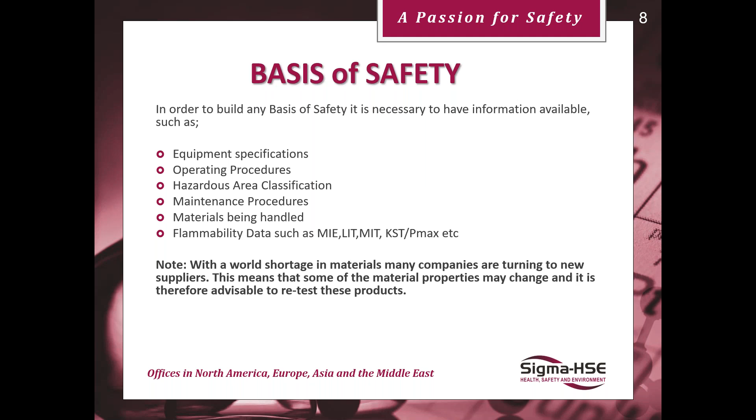With a world shortage in materials, many companies are turning to new suppliers. You may need to consider looking into these new supplied materials because particle size, chemical structure, etc. may alter the values that you have. So it's best sometimes to revisit and look to see whether you have the correct data.

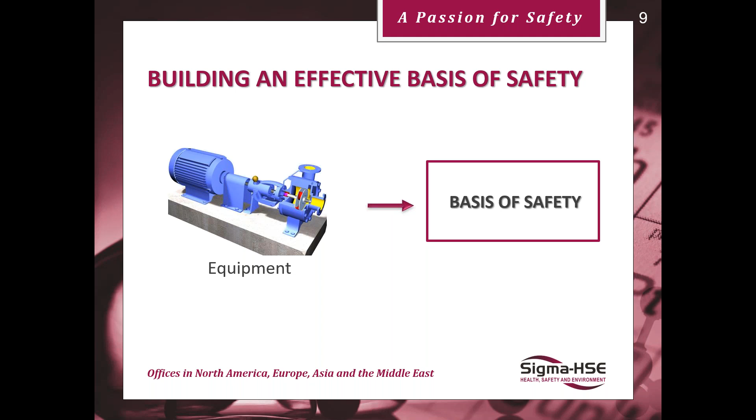So build an effective basis of safety. What equipment are you using? Silos, screw conveyors, hoppers, blenders, mixers, all that type of information has to be looked at, along with the procedures that you have in place for the operation. Are they mechanical? If so, what type of procedures do you have in place for making the operation safe? These have to be put into the basis of safety.

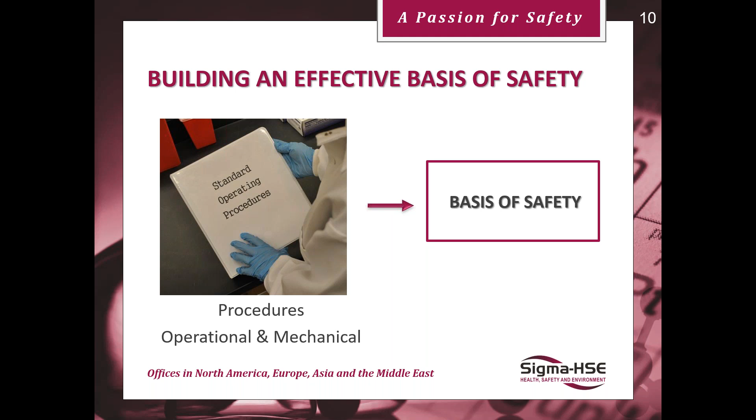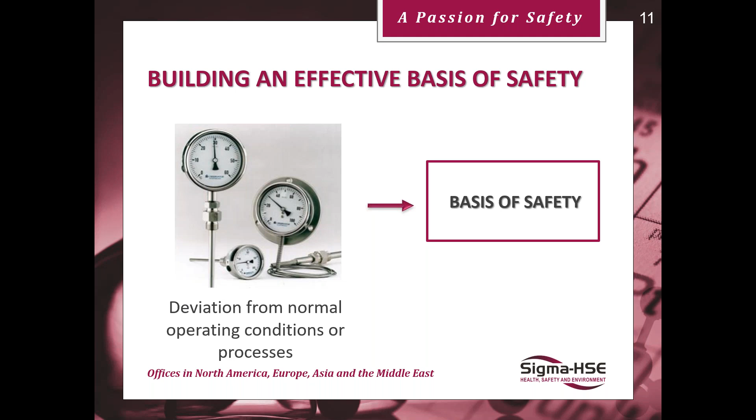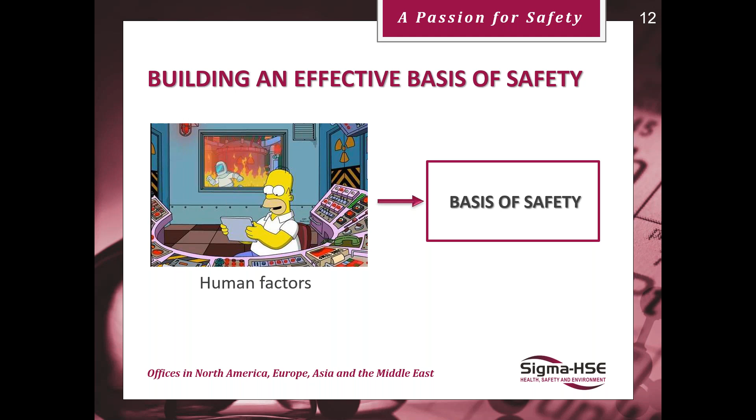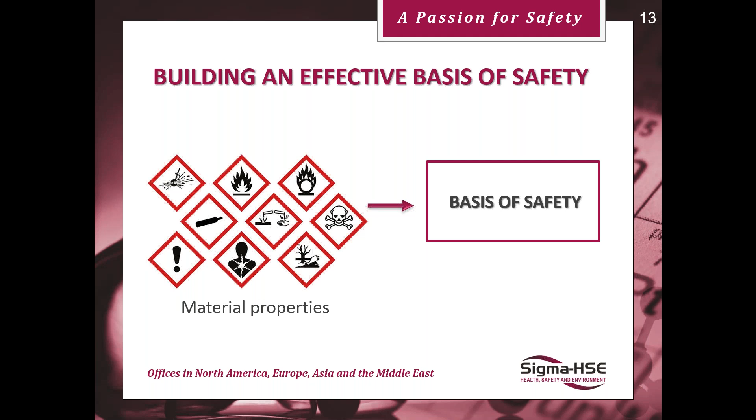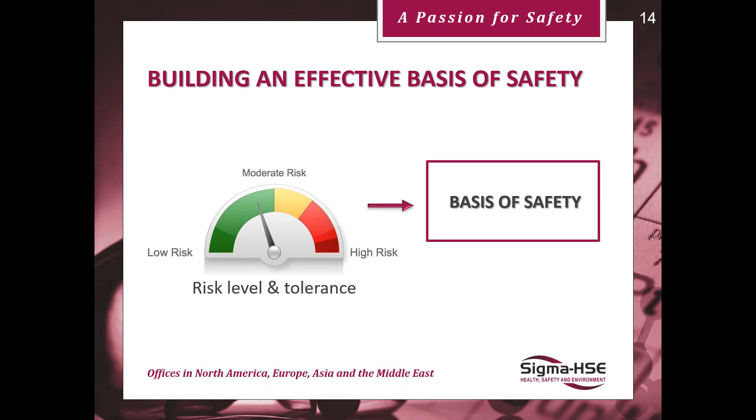One area we looked at many years ago was a grain operation with a silo and pneumatic conveying system, hoppers, etc. And they had avoidance of ignition and explosion protection as their basis of safety. Why did they do that? Because they were up on a hill, and down below them was an infant school. If anything had gone wrong, that could have affected the infant school. Therefore, their level of risk was extremely high.

There's many more things you could consider. So when you look at your operations and how it works, think of all the different things that you need to put into your basis of safety to make it work.

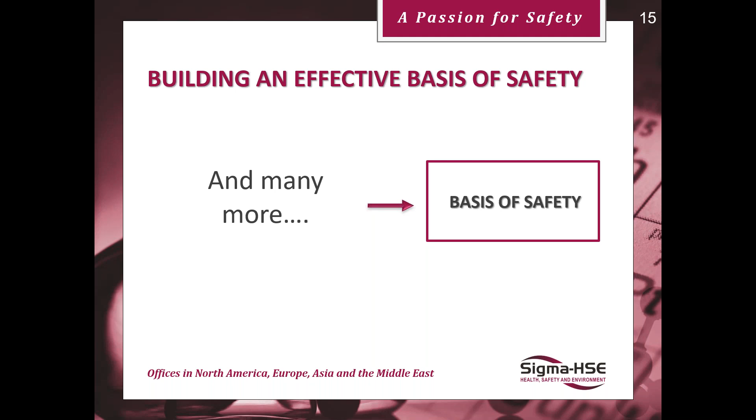We're looking here today at fires and explosions to do with dusts and powders. So normally there's three types of basis of safety for fire and explosion risk. We can look at explosion prevention. We can achieve this by avoiding flammable atmospheres, avoidance of ignition sources, avoid sufficient energy to ignite the explosion. And we could look at explosion protection, reduce the damage done to plant, or how they affect employees by explosions.

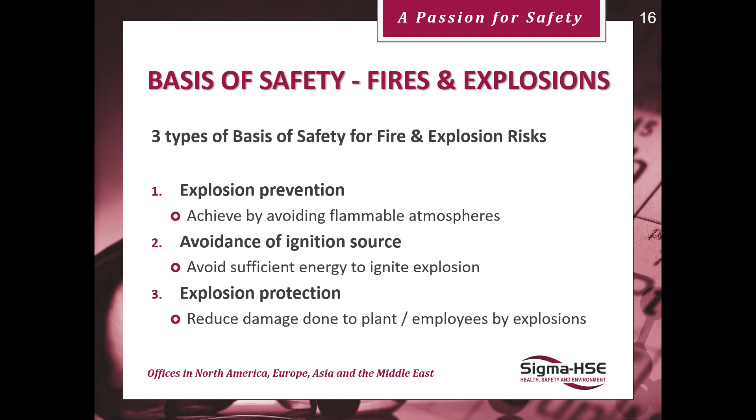So what are the conditions for a dust explosion? Well, the dust must be flammable or combustible and airborne to form a cloud. The concentration must be within the explosible limits of the fuel. The particle size distribution should be capable of propagating a flame, normally less than 500 micron. The atmosphere, normally air, in other words, the oxygen content of it, needs to support combustion. And they must have a sufficiently energetic ignition source to ignite the flammable dust cloud.

So we have the oxidant, the fuel, and the ignition source. That's in the shape of a triangle, or the fire triangle as we know it. Then we mix. So we mix the product and the air together to form, let's say, a dust cloud. And then it has to be confined. So the confining part of it creates the explosion.

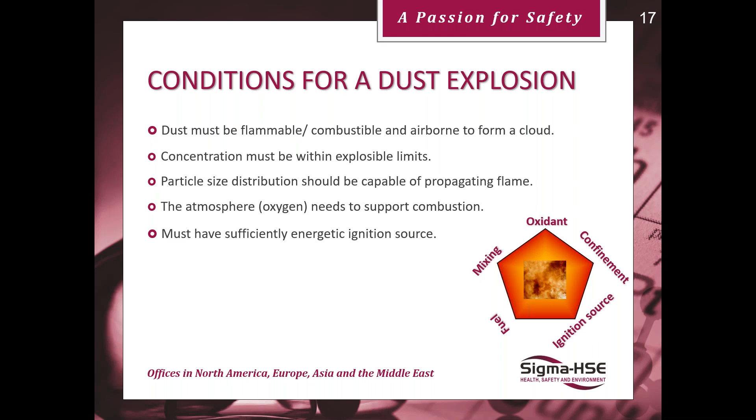So flammability testing, why is it important? Well, you need to know about it to understand the explosive properties of your materials. It's required to understand the sensitivity of materials to potential ignition sources. This could be mechanical, could be electrostatic, could be hot surfaces. It helps you determine whether you can stay outside the flammable limits or not. And it's a legal requirement on the EU safety data sheets as of 2021.

Testing can be split into 3 sections: explosion prevention, avoidance of ignition sources, and explosion protection. As we said earlier, the 3 types of basis of safety.

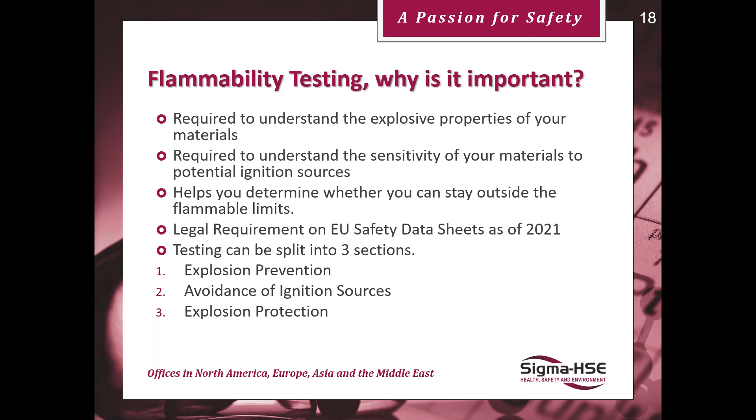I mentioned the EU safety data sheets. Annex 2 of REACH has been amended concerning the compilation of safety data sheets from the 1st of January 2021. I can remember being in a meeting talking about whether we should include this on safety data sheets. And surprisingly, a lot of people didn't have any knowledge at all about dust explosions. And after explaining it, straight away people realized the hazards and the risks involved with this, and then put forward, along with the US, to bring in flammability data.

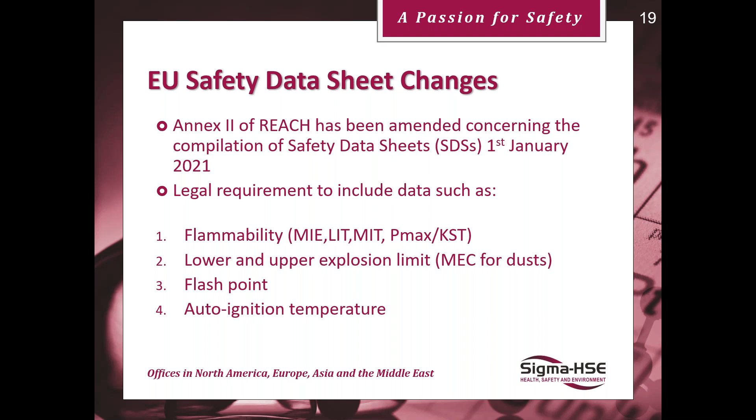These are safety data sheets, and therefore they should carry safety data for your operation. So with respect to flammability, you could have MIE, MIT, LIT, Pmax, KSt, for instance. They talk about lower explosion limits, the LEL and UEL, but this is the MEC for dusts. And then for liquids, flashpoint, auto-ignition temperature. Each one of these things needs to be put on a safety data sheet.

So a list of potential flammability data you could get if you look at your product. And it's going to depend on which basis of safety you select. So you've got the MIE, the minimum ignition energy, electrostatic and mechanical ignition risk. You've got minimum ignition temperature, considers hot surfaces. The layer ignition temperature for powder layers considers hot surfaces. The maximum pressure, the rate of pressure rise, and the St class are used for explosion protection.

The minimum explosive concentration, similar to the LEL, considers the flammable range. Limiting oxygen concentration looks at how effective inerting can be. Burning behavior, often one of the properties that people don't consider, but you really should look at it. This considers fire risk. How fast will a fire spread throughout a product?

Resistivity considers electrostatic issues and equipment specifications when working in zoned areas. Charge relaxation time works along with resistivity. And then you have thermal stability, particularly if you're drying and storing, coming out of dryers, for instance, you need to look at the ignition risk from thermal decompositions.

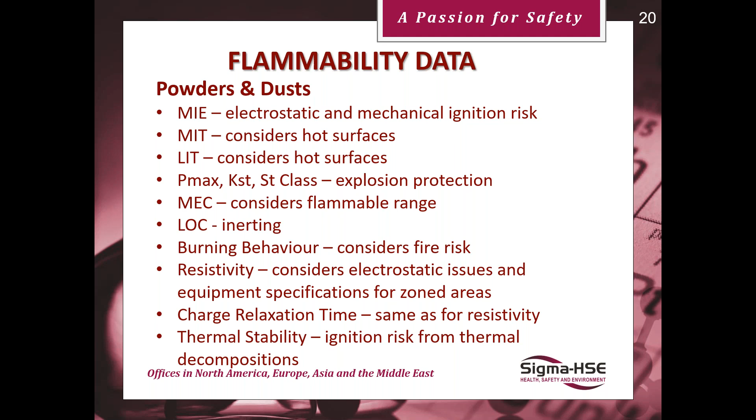So let's look at number 1 of the 3. The basis of safety is explosion prevention. First thing, have a look at the Group A-B classification. This determines whether a material will form a flammable atmosphere when dispersed in air. It could be as a dust cloud and therefore subject to the regulations set out in Europe for DSEAR or ATEX. It categorizes material into one of two groups.

Combustible, Group A, which means it's flammable or explosive as a dust cloud. If so, then you are covered by the regulations. Or non-combustible, Group B, in which case you don't have to worry. You're not covered by the regulations. You don't need any more information. It's conducted to BS EN ISO 80079-20-2 from 2016.

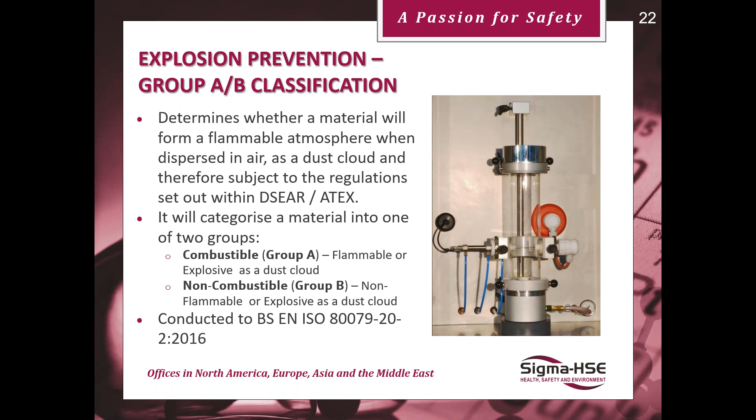So, limiting oxygen concentration. As we said, we need to remove the flammable atmosphere. Well, you can't remove the product because you're working with it. So the other alternative is to remove the oxygen out of the situation. So the minimum allowable concentration of oxygen in a mixture of dispersed combustible dust with air and inert gas, in which an explosion will not occur. Generally higher than for gases, typically 10 to 15%

by volume. But beware, we've had pharmaceuticals which have been at 5, and in my lifetime, I've met 3 which have been down at 4%. So don't assume they're going to be above 5%. Examples are using nitrogen as the inert gas. And they conduct the test under BS EN 14034-4 2004, and we are ISO EN 17025 accredited for these tests.

You can see here some examples: rye flour 13, organic pigment 12, methyl cellulose 10, beta naphthol 9.5, sulfur 7, paraformaldehyde 6, and aluminium down to 5. And we've had many pharmaceuticals at 5 and a few at 4. So always be aware you may be outside the band that you've got your oxygen set for.

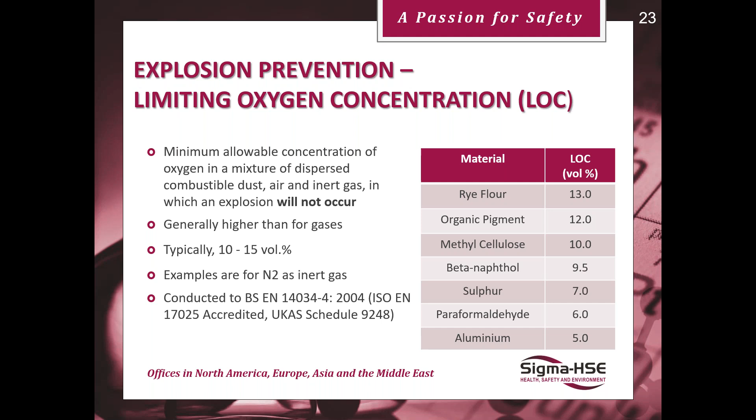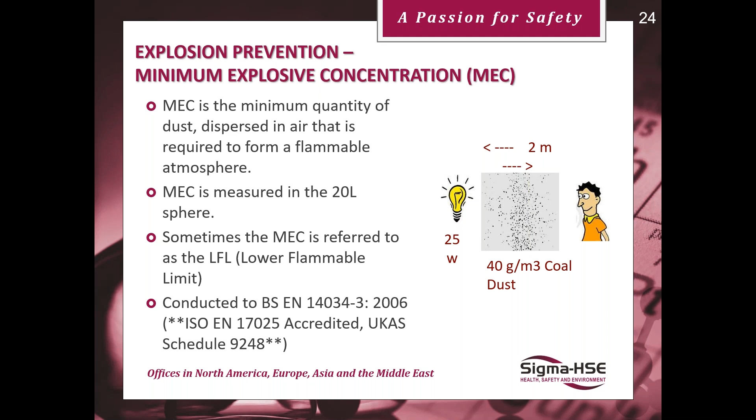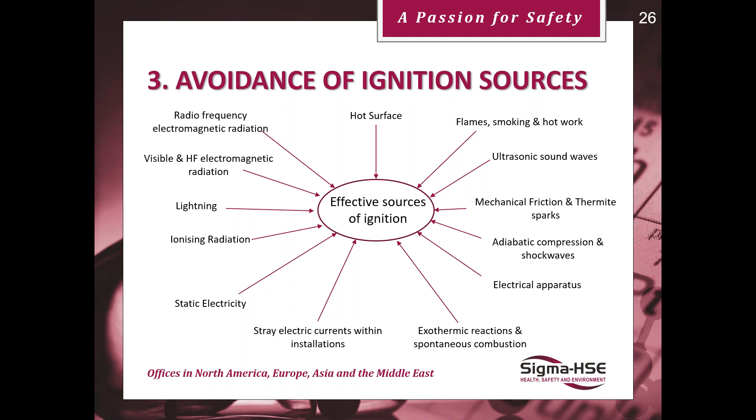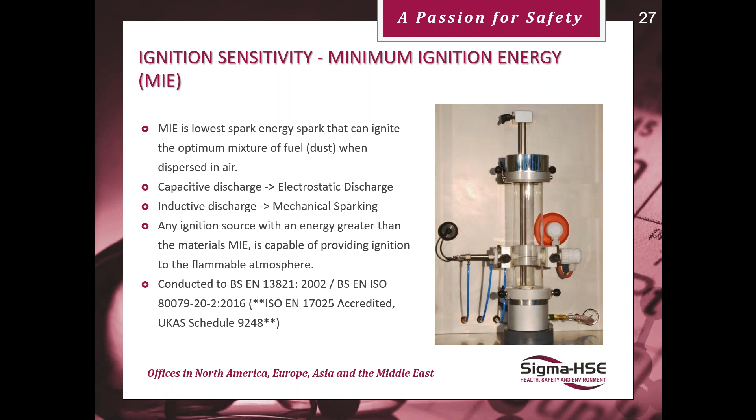It's purely capacitive discharge to look at electrostatic discharges. So if you get test data and you find out it's inductive discharge, this cannot be used for electrostatic assessment. These values will often be much lower than the purely capacitive discharge, and the inductive method is used for mechanical sparking only. Any ignition source with an energy greater than the material's MIE is capable of providing ignition to the flammable atmosphere. Again, conducted to ISO 80079-20-2, 2016, and UKAS accredited.

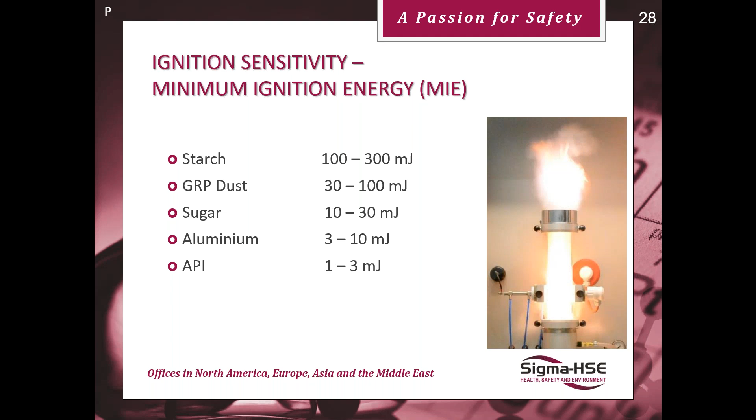Active pharmaceutical ingredients can be down to 1 or 3 or even less than 1, the same as a gas or vapor. People normally produce somewhere around 30 millijoules of energy, so beware even from GRP dust that a person could ignite it.

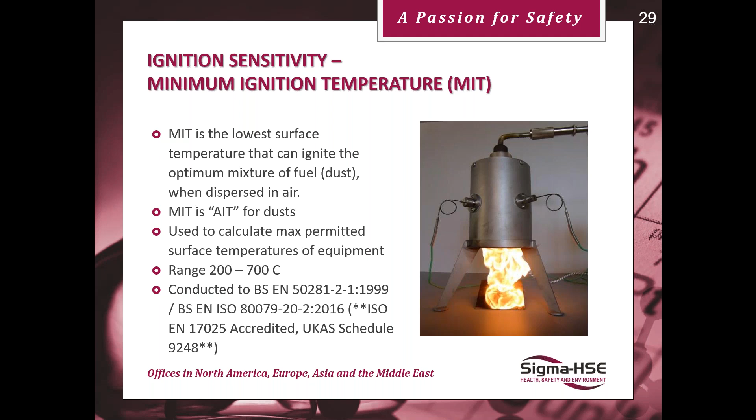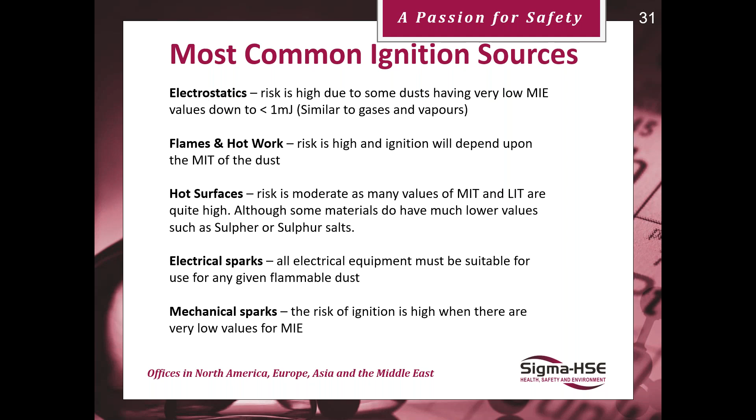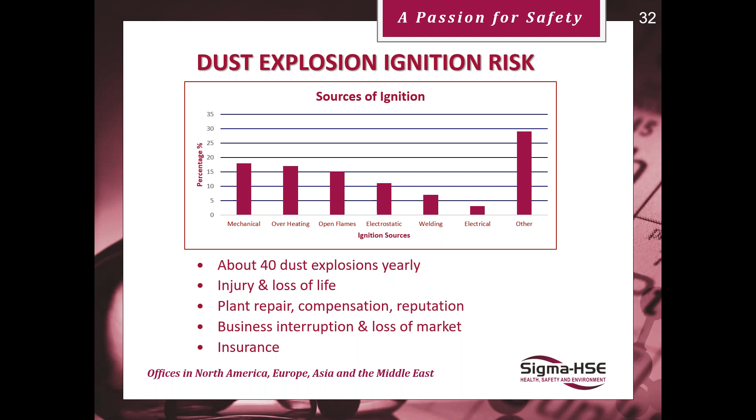So hot surfaces and temperature classes for dust. The maximum surface temperature of the equipment must be less than the LIT or MIT of the worst case material used. The temperature classes of equipment exist so that it can be properly specified for the application. For gases and vapors, you get T1, T2 down to T6. For dusts and powders, you don't get a T class, you get an actual temperature stamped on the equipment. So you need to look to see if you're above or below that.

For dust, limit temperatures of equipment as follows. If dust clouds are likely in the vicinity, then you look at 2/3 the MIT value. If dust layers are present, then look at the layer ignition temperature, take away 75 degrees. Often the LIT is much lower than the MIT for dust, mainly because for a dust cloud it's over and done within a few seconds. The LIT can sit there for 30 minutes.

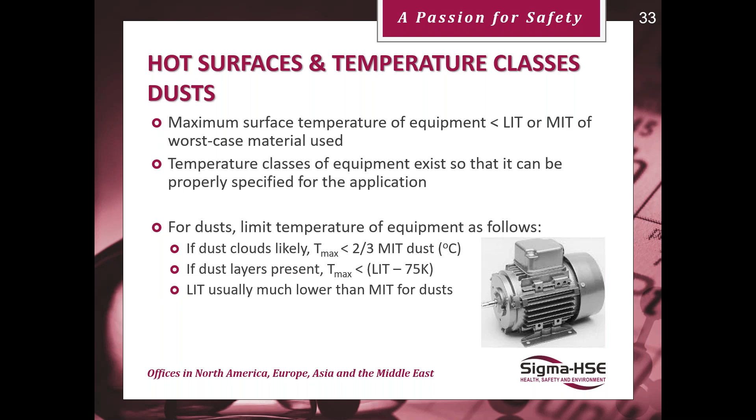So flames, smoking and hot work. Well, hot work should be controlled by a permitting system. So if ever you're going to do hot work, the engineering department has to issue a hot work permit for you. Always make staff aware of hazards to avoid likelihood of common ignition source problems. So tell them what can cause the ignition of your materials, what they need to avoid when they're working in the areas, whether it's an electrostatic problem, whether it's flames, hot work, etc.

Smoking must be banned in hazardous areas and only permitted in designated areas. Luckily, all the plants I've visited tend to have a smoke-only zone where people have to go to. Often control all access to hazardous areas, not just smoking. So only people who are working in those areas are allowed to go in there.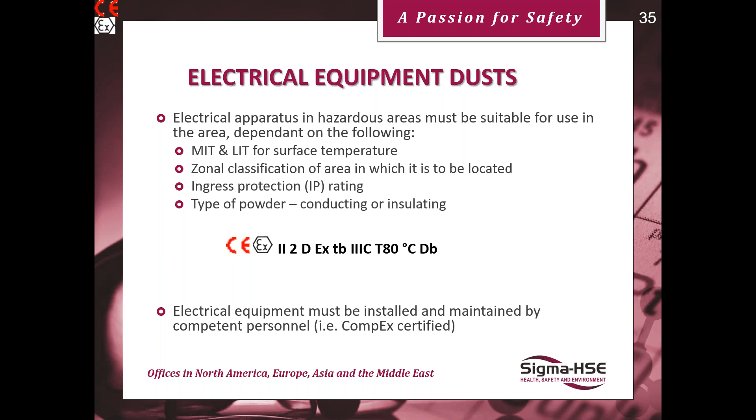The electrical equipment must be installed and maintained by competent personnel. These must be CompEx certified within the UK. I mentioned mechanical equipment, 6 potential ignition sources by non-electrical equipment. So you've got hot surfaces, flames and hot gases, mechanically generated sparks, electrical ignition sources, except for stray currents, and static electricity. Equipment in hazardous areas should undergo a non-electrical equipment ignition risk assessment, or NEIRA.

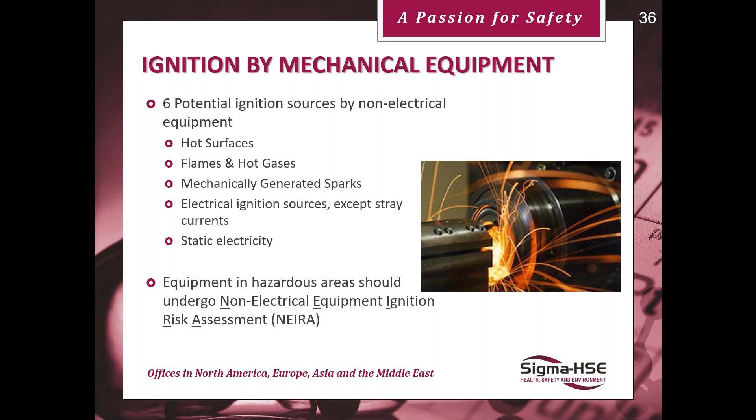So how do you prevent it? Reduce the energy, less than the MIE of the dust. Use slow rotating equipment, less than 1 meter per second. Make sure tramp metal and foreign bodies don't get into the equipment. Make sure bearings and seals are mounted externally to the equipment, not internally. Control the material feed rates, keep them low. Have temperature monitoring, especially on the bearings, for instance. Have a well-established maintenance, inspection, and lubrication system in place. And good housekeeping, keep dust off of the equipment and clean out the equipment as much as possible, especially in batch production.

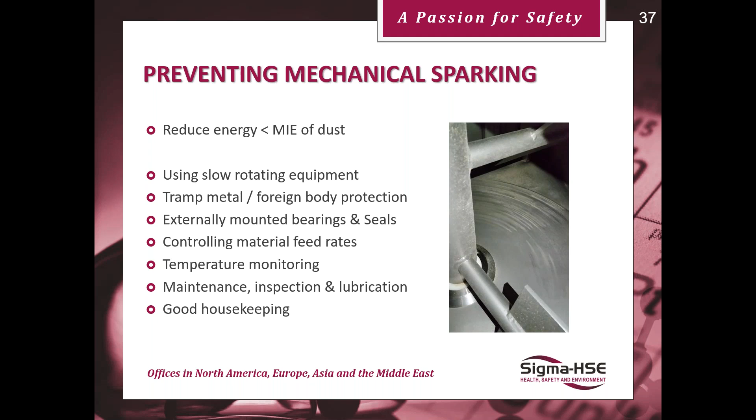So, typical risk assessment considerations here for the NEIRA. CE markings, IP ratings, the speed of the moving parts, good earthing, get it checked as part of your regular electrical equipment assessment, the materials of construction, temperature rise and rating, the emission of sparks, can it happen? Selection of materials to avoid electrostatic charges, avoidance of frictional contact between steel and certain alloys,

the minimization of leakage of dangerous substances from the equipment, dust layer impact on temperature rise, operating procedures, maintenance activities, the operating environment that it works in, prevention systems you have in place, what mitigation systems do you have in place? Are you following manufacturer's instructions? And is the installation installed correctly? Quite a list.

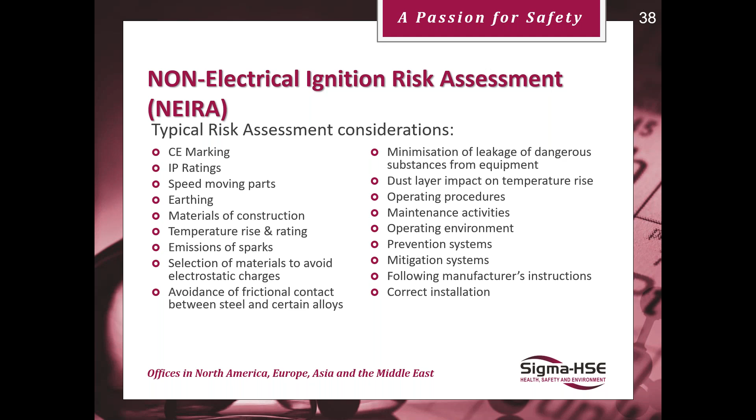Typical example here. Electrostatics can come from isolated conductors. You have a gearbox, albeit on the outside, but still can get hot. Rotating blades, friction, impact, grinding sparks, hot surfaces from the motor body and bearings, mechanical sparking, contact between baffles and the casing and the blades.

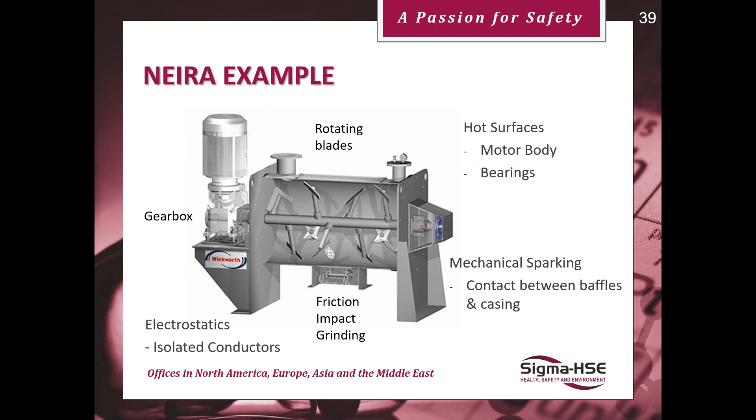After mechanical, we can look at static, mentioned explicitly in DSEAR and ATEX as one of the ignition sources to be controlled. Don't forget, static electricity is generated wherever movement takes place. Static electricity is often intrinsic to the intended process, so it's very difficult to minimize it. And it is a specialized topic. This is one of the things where I say a little bit of knowledge is a dangerous thing. And believe me, I've seen it in industry where people have done things to do with electrostatics which have caused an explosion when they thought they were doing right.

So how do you assess static hazards? Firstly, have you a flammable atmosphere? If so, what can generate the charge? Can the charge accumulate? What quantity of energy is produced? And what is the discharge mechanism? This is all part of the electrostatic ignition assessment.

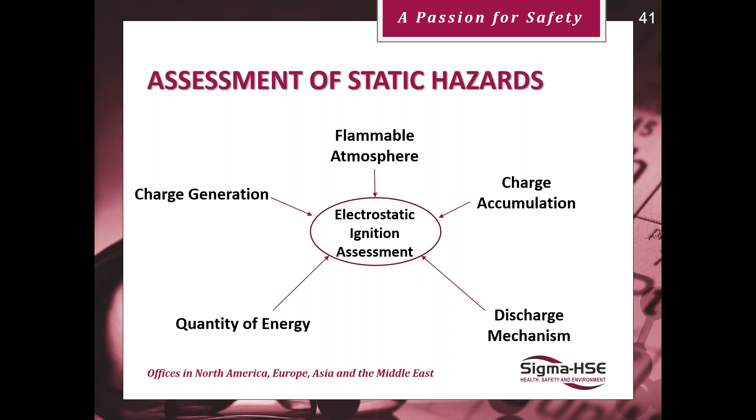Typical static discharge: corona, from sharp points of earthed conductors, minimal, much less than 1 or 2 millijoules. Brush, the sort of thing you get on your jumper when you take a nylon jumper off, 3 to 4 millijoules. Gases and vapors, not dusts, but now they've proved conclusively that brush discharges, no matter what the MIE is, will not ignite a dust cloud. Again, this is something I've pushed for 20 years.

Spark ignition, isolated conductor discharge to earth or other conductors. The energy is measured as half CV squared. 0 to 100 millijoules, sometimes a little bit more. Gases, vapors, dust and mist, where the energy is greater than the MIE. Cone discharge, highly charged insulating material filled into metal earthed silos, up to 150 millijoules, obviously gases and vapors, dust and mist, where the energy is greater than the MIE.

And the big one, propagating brush discharges, two surfaces of highly resistive material oppositely charged with a short circuit. And normally you have a metal substrate here, up to a joule in energy, massive discharge, gases, vapors, dust, everything, and it can cause extreme damage and extreme harm to human beings if you get hit by a propagating brush discharge.

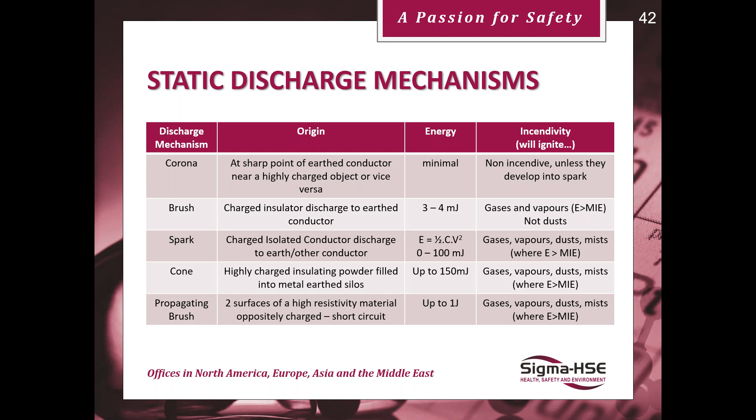So, summary of avoidance of ignition sources. Consider all types of ignition sources, but concentrate on the following: hot surfaces, flames, hot work, electrostatic, mechanical, and electrical. If you look at those 5 for the majority of places, then that will normally allow you to do an avoidance of ignition sources. Obviously, if you have any of the other ignition sources present for specialized industries, then take those into consideration.

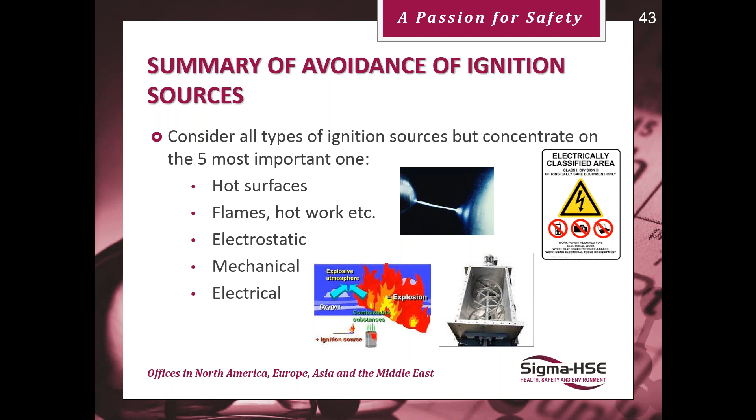So how do we go about avoidance of ignition sources? Perform the hazardous area classification as zone 20, 21, 22. Ensure all equipment is suitable for use in zoned areas. Consider more detailed assessments when you're looking at electrostatic problems, electrical installations, and mechanical sparking. Control all naked flames and hot work by permit systems. Make sure you get the flammability data. Without the flammability data, you cannot use avoidance of ignition sources. Understand if a potential source of ignition can become active, but more importantly, does it become effective? And then you need to write this into your basis of safety report.

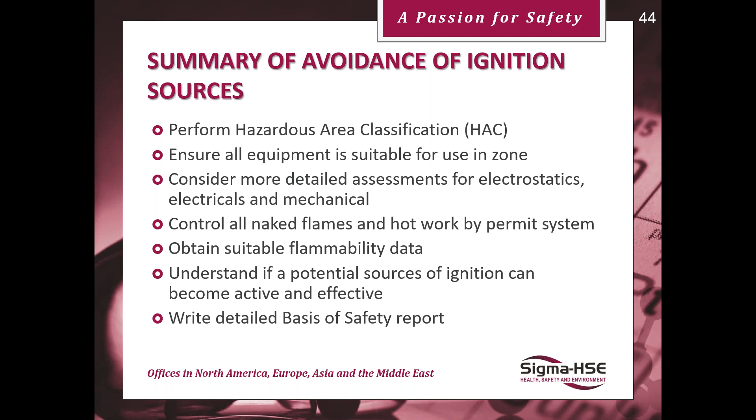We look at explosion protection now, number 3 of the 3 we talked about. To give you some sort of idea when things go wrong with pretty benign type materials, the Imperial Sugar explosion from 2008 resulted in 14 deaths, 38 injuries, 14 with life-threatening burns. The explosion was fueled by accumulation of sugar dust and explosion propagation throughout the building. This is what sugar dust did. When you think of sugar dust, you don't think of it capable of doing this. And that's exactly what Imperial Sugar thought as well. So they didn't bother with the basis of safety, and they didn't bother finding, when they made amendments to the equipment, how it would affect the safety of their plant.

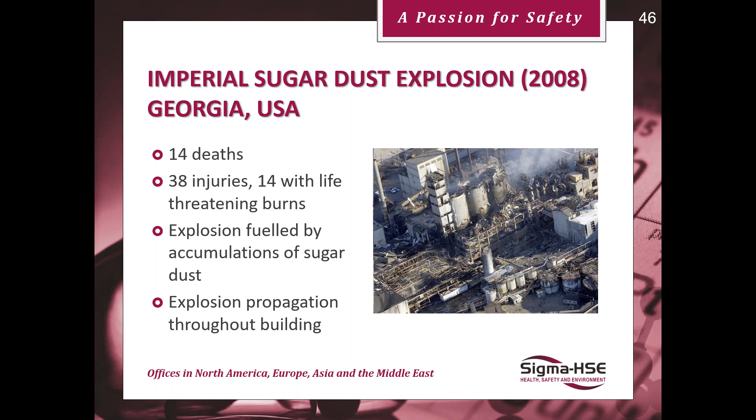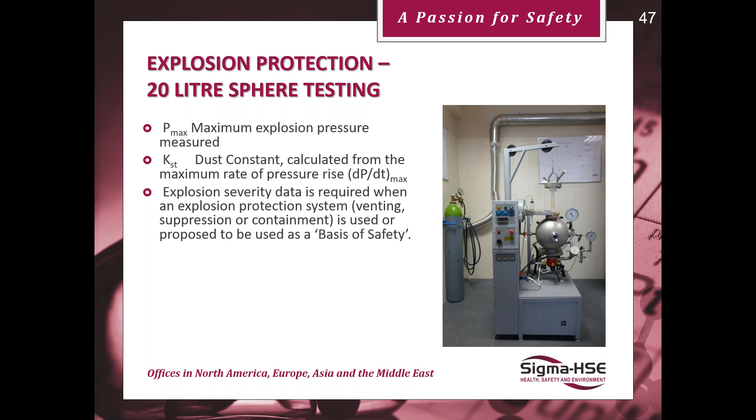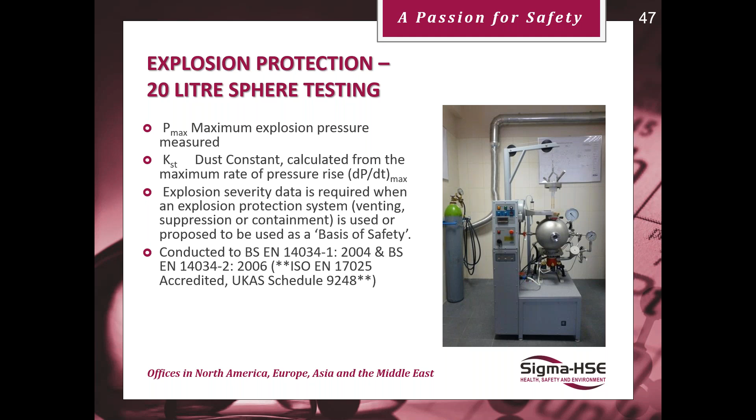So the main important piece of equipment is the 20-liter sphere. Pmax, it can measure the maximum explosion pressure. KST, K is constant, Staub is dust, so it's the dust constant calculated from the maximum rate of pressure rise. And this doesn't change depending on the size of the vessel, by the way. So KST is what you use for any size vessel. The explosion severity data is required when explosion protection systems such as venting, suppression or containment are used, or are the proposed basis of safety. Conducted to BS EN 14034-1 2004 and -2 2006. Again, UKAS accredited test.

Explosion indices you can see here. ST0, no KST, no explosion. Example material, silica. ST1, what they call a weak explosion. That was the sugar from Imperial. As you can see what it did. KST values between 0 and 200: powdered milk, charcoal, sulfur, sugar and zinc. ST2, strong explosion, 200 to 300 KST: cellulose, wood flour and polymethyl acrylate. Big explosion in the UK with wood flour. Destroyed the factory and killed 2 people.

ST3, greater than 300. Very strong explosion. Anthraquinone, aluminium and magnesium, the metal type powders. Aluminium lithium hydride used in car batteries gave us the biggest explosion I've ever seen. That had a KST of 1,200, slightly bigger than 300, bigger even than aluminium at 650, and the maximum pressure was 25 bar. I didn't even think our equipment was going to be able to test it in the end because it was so violent.

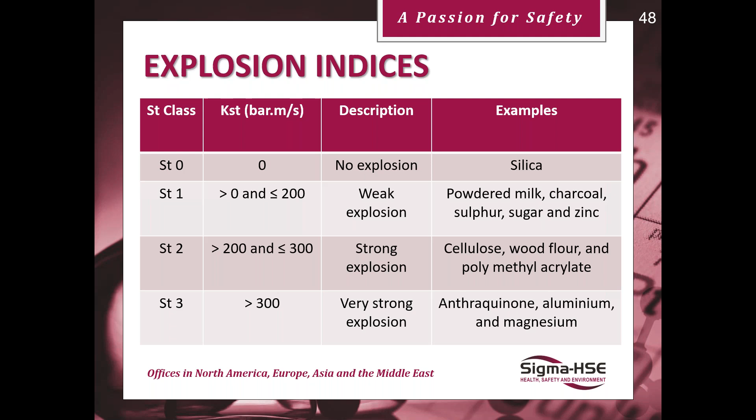So, mitigation of risks. If risks cannot be eliminated or controlled, you have to look at the detrimental effects. Reduce the number of employees exposed, often not possible. Avoid the propagation of fires and explosions, very important. Install explosion relief arrangements. You may choose explosion suppression. You may choose containment. Look at personal protection equipment.

And if several dangerous substances are present, then take account of the worst case. Look into the safe handling, storage and transport of dangerous substances, including waste. Waste is not waste, it's your material that you put through your process. Do not look at it as being not a problem. It is your material.

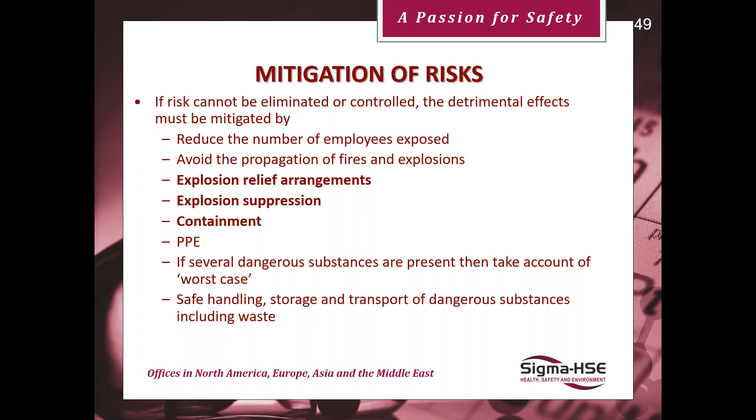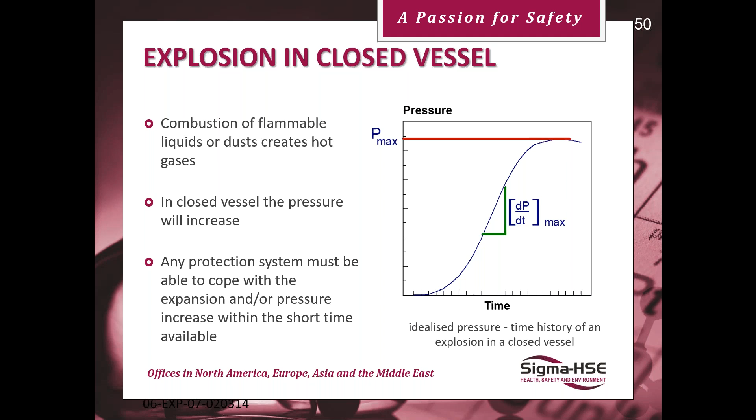So, explosion in a closed vessel. Combustion of flammable liquids or dust creates hot gases. In a closed vessel, the pressure will increase. Any protection system must be able to cope with the expansion and/or pressure increase within the short time available. You see the trace on the right: it starts off at the bottom, then you enter the ignition source, the pressure rises, dP/dt, and reaches a maximum pressure at the top. So this is the idealized pressure-time history of an explosion in a closed vessel, such as the 20-liter sphere.

Isolated pieces of equipment where explosions occur: when you choose containment, you must isolate the pieces of equipment. All isolated plant must withstand overpressure over the course of its use as well. The advantage is no release of combustion products or toxins. It stays within the vessel. No requirement for provision of safe areas. It stays within the vessel.

On the other hand, equipment is expensive to build and maintain. Maintenance must understand there's 24 bolts around the vessel. That is because it's containment. It is not there to just seal the vessel, where you would only have 6 bolts. They require pressure testing and associated documentation. And often, because of having to withstand an explosion, the equipment is very heavy.

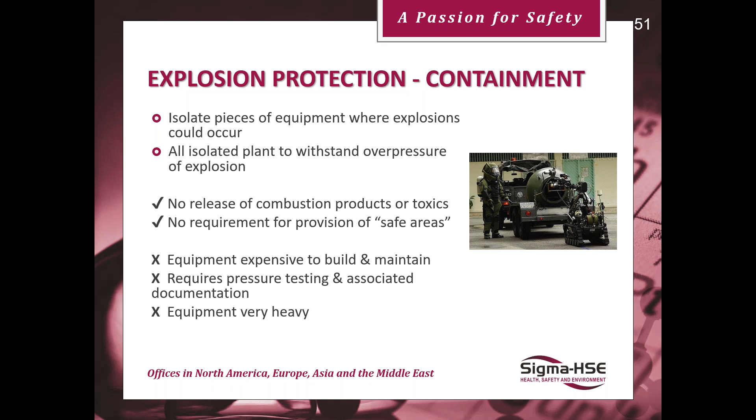So all parts of the plant must be made strong. This includes the pipes, the ducts, the flanges, the covers, everything. It must withstand the maximum pressure that is expected. As I said before, maintenance have to make sure it maintains the strength over the lifetime of the vessel. It must be explosion pressure resistant or explosion shock resistant, and it could take some deformation. Strong plant is expensive to build and can be difficult to operate.

The most common explosion protection we use is venting. It protects plant and personnel from the effects of an explosion. It controls release of pressure via weak open sections. Vent sizing can be designed taking the KST and the data from the 20-liter sphere. The good part is it gives the ability to control the release location. Passive protection systems can be retrofitted to weak equipment.

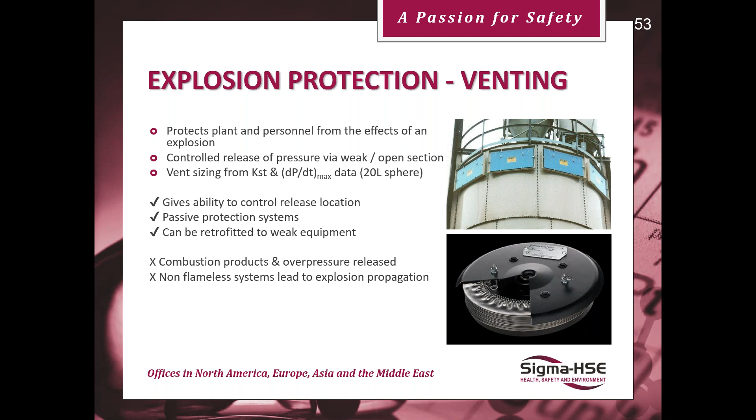Bad points: combustion products and overpressure are released. Someone was working with toxics and said they wanted to use explosion protection, and they ran the risk of blowing the product over their car park. Non-flameless systems lead to explosion propagation. So advantages: it can be designed in-house, relatively cheap for the vent itself, needs little maintenance, has a very wide range of applications.

Disadvantages: as I said, material is released out across the area for a substantial distance. It's unsuitable for materials that are toxic or corrosive, etc. It must discharge outside the building. It restricts the siting of the plant item to outside walls, and you need a large, safe area for this to work.

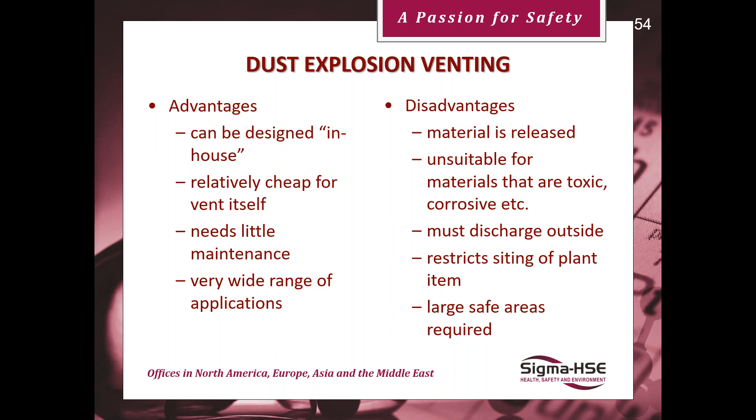Getting more common today, flameless venting. These are special devices attached to the explosion vent that can stop the flame while allowing venting. Such as the Q-Rohr and the Flam-Quench. The efficiency, however, is reduced compared to a bursting disc, obviously because you have restrictions within it, and it needs to be type tested.

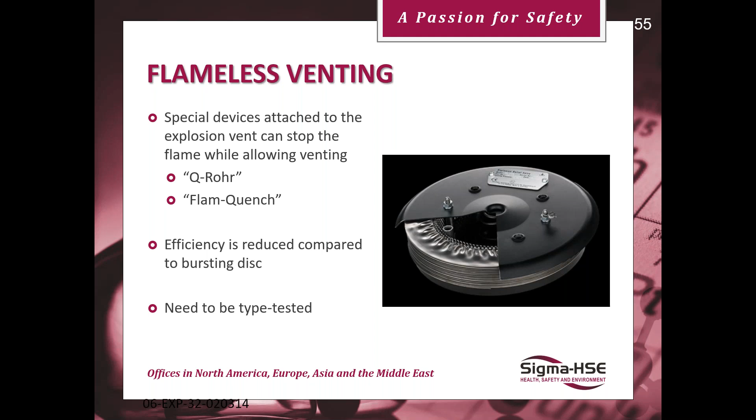The idea is the flame is prevented from exiting the vent, but please remember, the flame doesn't come out, but high pressure and smoke can still fill the workspace. So it must be sited in a restricted area. Don't put stuff around it that can blow up into the air close by it.

It must be suitable for the materials being processed. Again, toxics, and obviously caramelization can block the vents. So if you're using it with materials like sugar, make sure these things are cleaned out and checked for suitability through their lifetime.

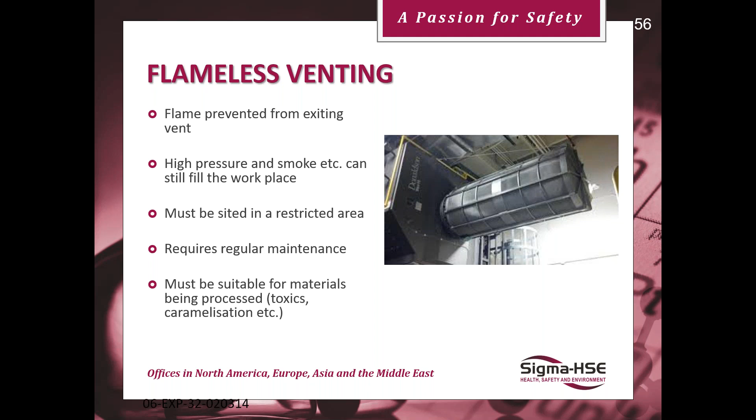Explosion relief doors. They don't require replacement after the explosion. The door blows open and then closes again. They're easy to maintain and cheap to fit. The bad part about them: you need to prevent the door closing too quickly after an explosion, because otherwise you get a vacuum in the vessel.

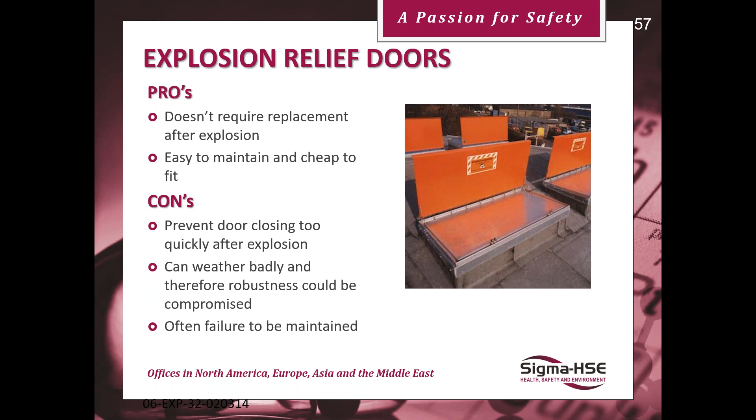They can weather badly and therefore robustness could be compromised. These are often covered in dust, rust, leaves, branches, you name it. So always make sure they come under a maintenance program to be looked at; often there's a complete failure to be maintained.

If the vent opening closes after the explosion is vented, the hot combustion gases will cool down and create a negative pressure, as you can see on the left. So VDI 3673 provides information on vacuum breakers in these cases.

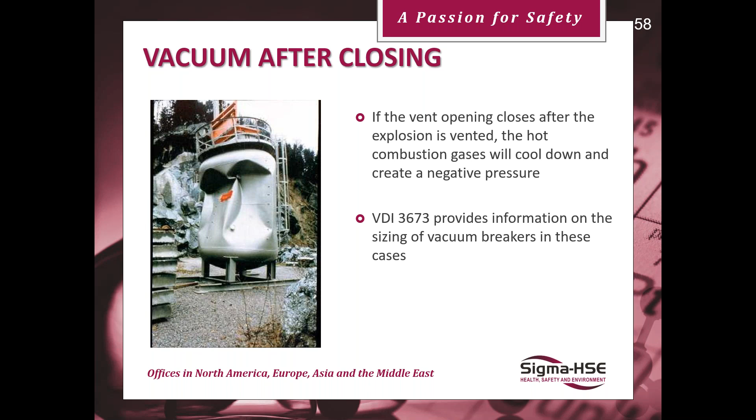Flame propagation. Most of the fuel-air mixture will be expelled from the vent and burn outside the vessel. For dust, the length of the flame is 8 to 10 times V to the one third. So let's just take a 1 cubic meter vessel, the flame is 10 meters long, but they don't ever go more than 60 meters. And for gases, it's 5 times V to the one third. The width of the flame is difficult to predict, but there is a formula around that you can use for dusts.

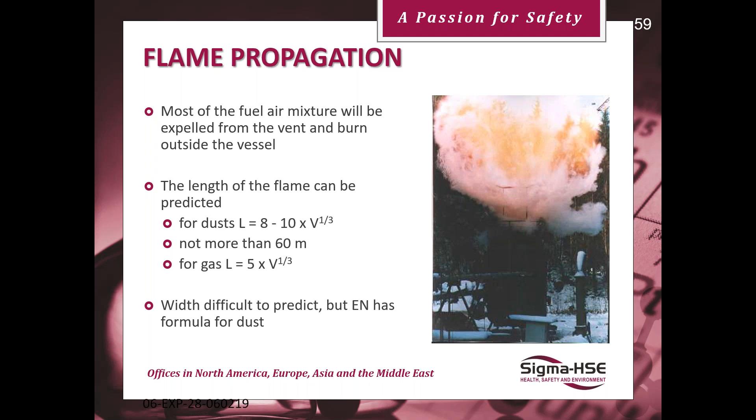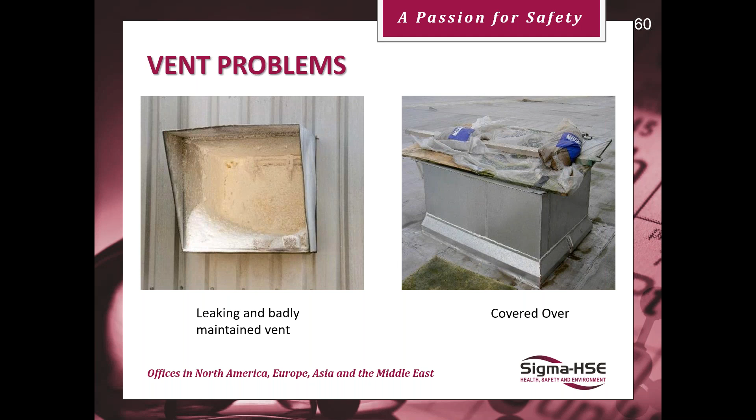You could also choose suppression. In other words, extinguish the explosion in the early stages by an injection of pressurized suppressant at a given pressure. There are no external effects of the explosion. It's suitable for toxics. It does rely on effective explosion detection and highly specialized design. And when it goes off, you're going to have to completely replace the whole system again, get it recharged, and your product is destroyed.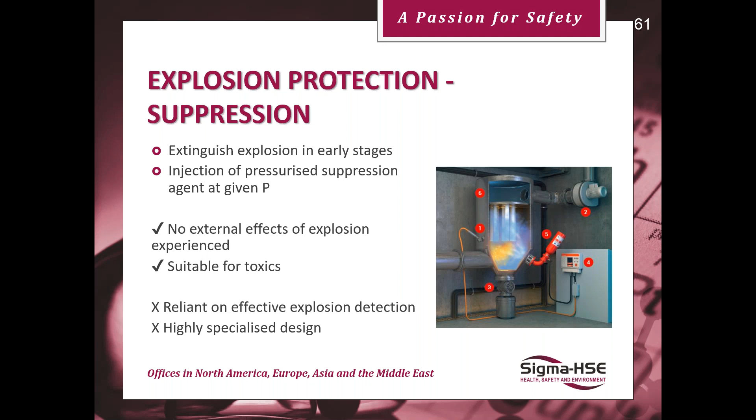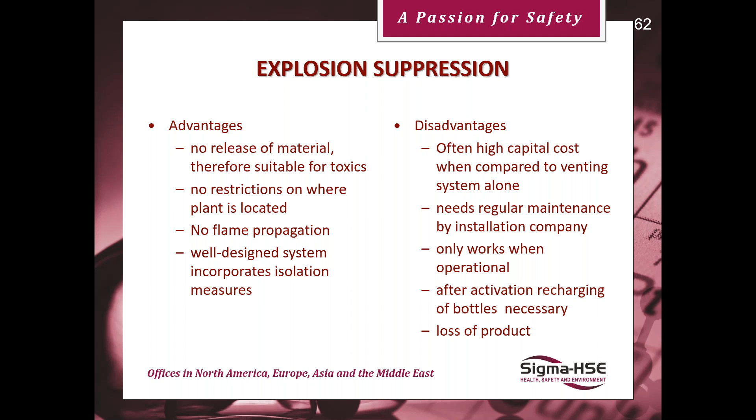So advantages: no release of material, therefore suitable for toxics, no restrictions on where the plant is located, no flame propagation; well-designed systems incorporate isolation measures, must be isolated. Disadvantages: often high capital costs when compared to venting, needs regular maintenance by the installation company, only works when operational. After activation, you must recharge the bottles, and there is a total loss of product. Examples here: fluid bed dryer, dust collector.

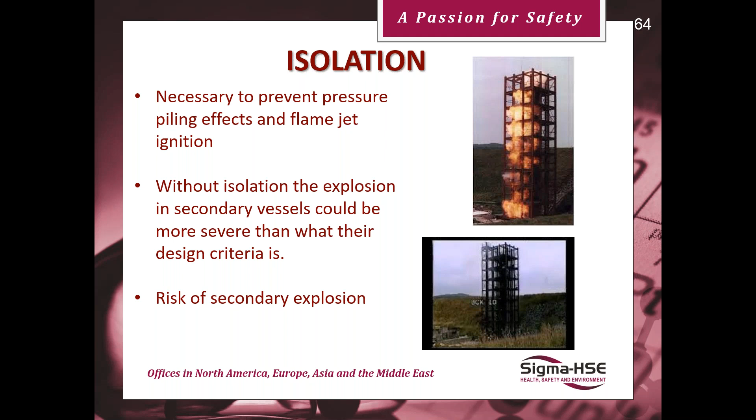Isolation is necessary to prevent pressure piling effects and flame jet ignition. Without isolation, the explosion in secondary vessels could be more severe than their design pressure, and risk secondary explosions. When the explosion occurs, you actually start off with a higher initial pressure, so you can double the explosion violence in the second vessel. Isolating equipment such as rotary valves, fast closing valves.

So summary for explosion protection: determine the flammability characteristics of the material. How else do you know the size of the vent or the suppression system, etc.? Review SDS to see if materials have hazardous properties, are they toxic, etc., to make your choice. Hazardous area classification to identify the equipment location. Venting and suppression systems need to be designed and installed correctly, as should fire protection.

For containment, the vessels need to be certified for use at expected pressures, and maintenance needs to be trained for pressure vessels. Location may be a problem for venting, normally only on outside walls. Confirm suitable isolation is in place. Assess special procedures such as hot work permits, management of change, permit to work, etc. And personnel working in hazardous areas should always be correctly trained, no matter what the basis of safety.

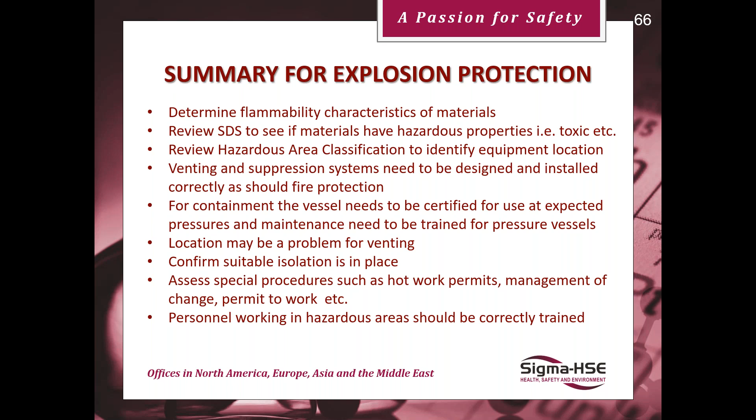So, overview of basis of safety: a combination of measures relied upon to ensure safety. It highlights the aspects of design and operation that are safety critical. Many items to consider, such as the equipment. As I said, you need to know how your equipment works, how it's maintained, for instance. What type of equipment? Is it fast rotating equipment or just a silo? What procedures do you have in place? Do you have proper SOPs in place when you're working within hazardous areas to tell people what hazards they're working with?

Deviations. If you are going to deviate, which I don't advise, then before you do, review your basis of safety. Make sure that your basis of safety covers the deviation that you're working with.

And human factors. As I said, humans can be absolutely brilliant. They can smell smoke. They can hear something going wrong with the equipment. But on the other hand, they can be extremely dangerous. They can do the most stupid things ever. Not only that, in my experience, they do them once and they actually repeat it again. And I've seen this on many an occasion.

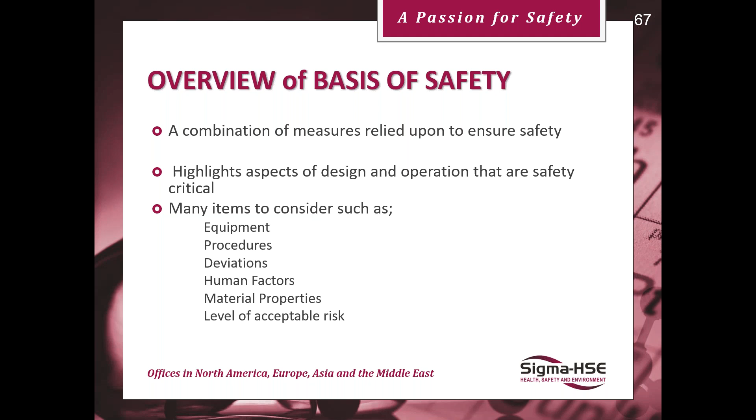The level of risk, again, could be fairly low if you're out on a greenfield site. If you're working in a very built-up area, or you have lots of personnel around the equipment, then the level of risk could be much higher. You may need to take better measures.

So things like electrostatic ignition, mechanical ignition, hot surfaces, flames, etc. you need to take into consideration. And often, avoidance of ignition sources is the preferred basis of safety, but must be used in conjunction with one of the other for certain types of equipment.

In explosion protection, you can have venting, you can have containment, you can have suppression. The choice has to be determined on what type of material you're using. If you're using toxics, venting is out of the equation. If you haven't got people trained in pressure vessels, then containment may be out of the question.

And your only recourse may be suppression, but beware, they're quite expensive to fit. The company who fitted the equipment has to maintain them regularly. And once they've gone off, your equipment is a total loss of product.

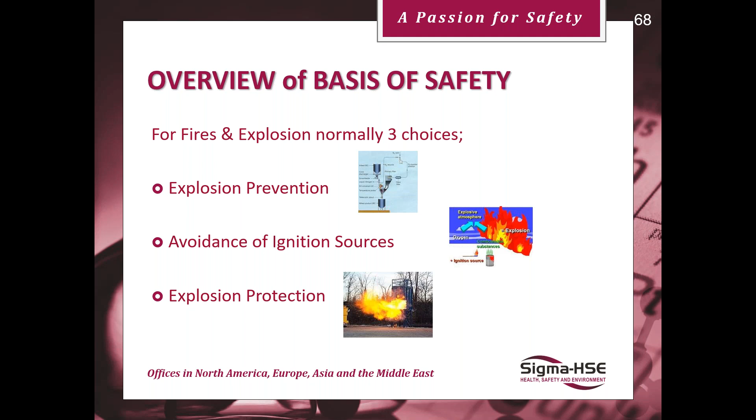So, explosion prevention. Several ways to achieve this, including change the flammable material, not often a possibility. Remove the oxygen, inerting. Work outside the flammable range for gases and vapors. Not really possible for dust, as powders are non-homogeneous, and often a slug of powder comes through within the flammable range.

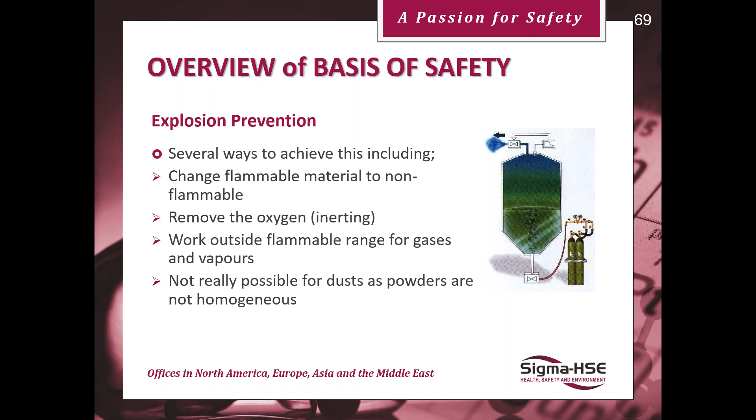Avoidance of ignition sources. All ignition sources need to be considered. EN 1127 Part 1, as I showed you before, has 13 potential ignition sources listed. The most common, though, that you need to consider are hot surfaces, naked flames, hot work, and fires.

Look at electrical equipment. Make sure it's suitable for the zone you're in, a zone 20, a zone 21, or a zone 22. Check they're not poorly installed and maintained, equipment and cabling. Many times I've been to companies and seen the correct piece of equipment in place, but chocolate box connectors there, open boxes with electrical wiring showing.

These all have to be correctly to the right IP rating, etc. So make sure the whole installation is installed properly and it's regularly maintained by your electrical department. Electrostatic discharges. Make sure you know what electrostatic discharge can ignite your product, and then try to avoid those and remove them out of the equation.

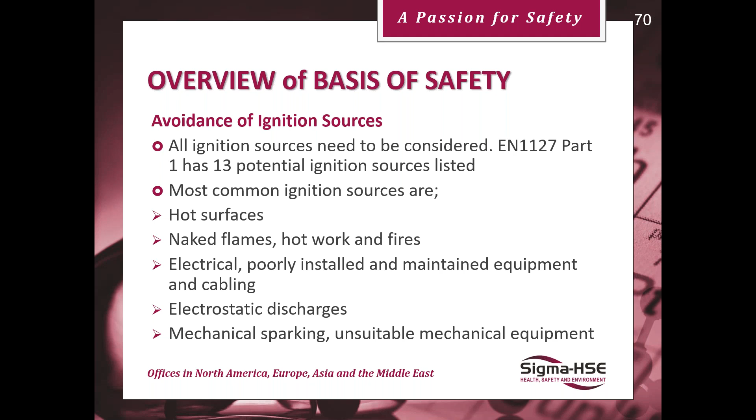Mechanical sparking. Don't have unsuitable mechanical equipment in place. Make sure your mechanical equipment is proper for the zoned area that you're putting it in. Overview of the basis of safety. Material properties, powders and dust. You can't prove your basis of safety unless you have it.

So consider things like MIE for electrostatic and mechanical ignition. It may also be necessary to obtain further electrostatic properties, powder volume resistivity, charge relaxation time, or chargeability. Is the material conductive, static dissipative, or insulating? What is the minimum ignition temperature for mechanical ignition? Layer ignition considers hot surfaces on electrical equipment as well.

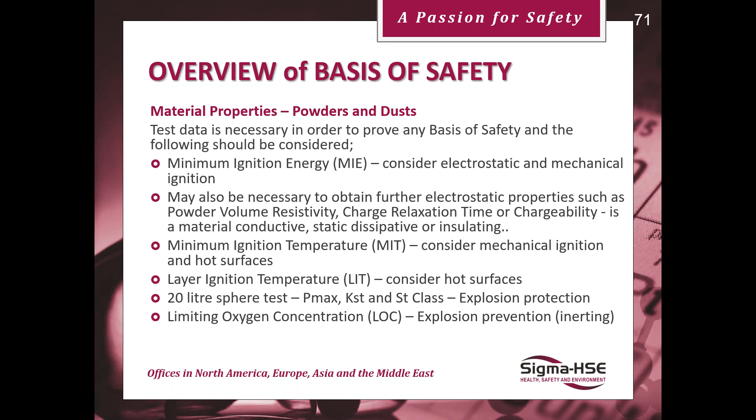20-liter sphere test for explosion protection, limiting oxygen concentration for explosion prevention. And if you're drying or you're storing under elevated temperatures, then thermal stability testing must be considered. So, summary here for the basis of safety. Hazardous area classification, the potential ignition sources that you've identified.

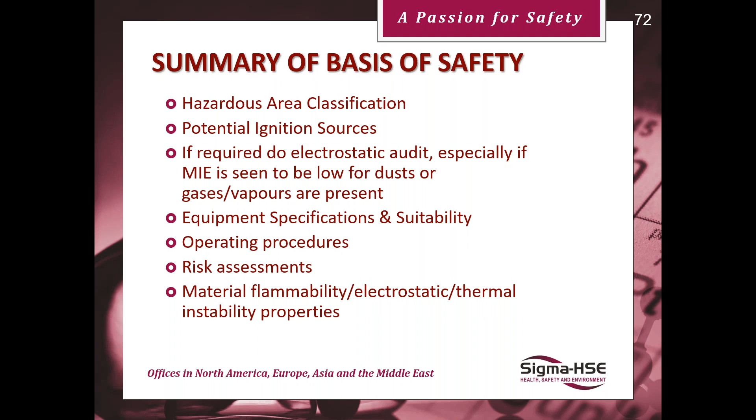If required, do a complete electrostatic audit, especially if the MIEs seem to be low for dust or the gases and vapors present. Look at the equipment specifications and their suitability. Have you operating procedures in place? Do proper risk assessments. Material flammability, electrostatic, thermal instability properties also need to be considered as a very important part of the basis of safety.

Assess process to understand the manufacturing hazards. Are you charging and discharging, mixing? Process maintenance procedures such as hot work permits, management of change, permit to work, etc. Personnel working in hazardous areas should always be correctly trained. Determine what basis of safety can be used and confirm that it is suitable once all the information has been analysed.